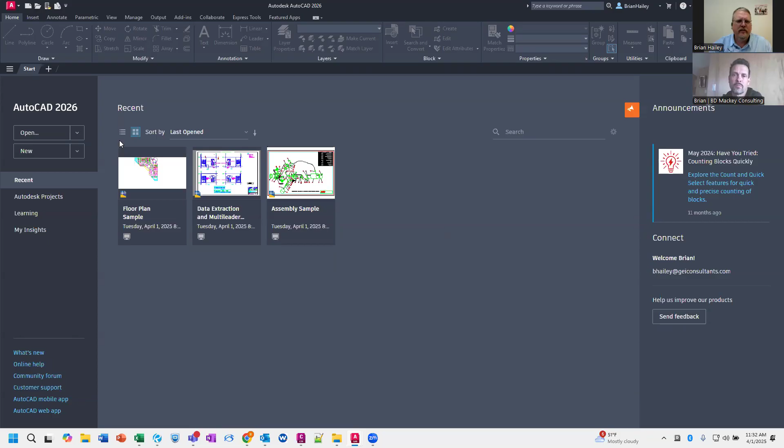Excellent, okay, so the first thing I'd like to show off with 2026 is the new block identifying thing. So let me go ahead and open up a drawing here, and I think this is pretty cool. Where did I put that? I put that here.

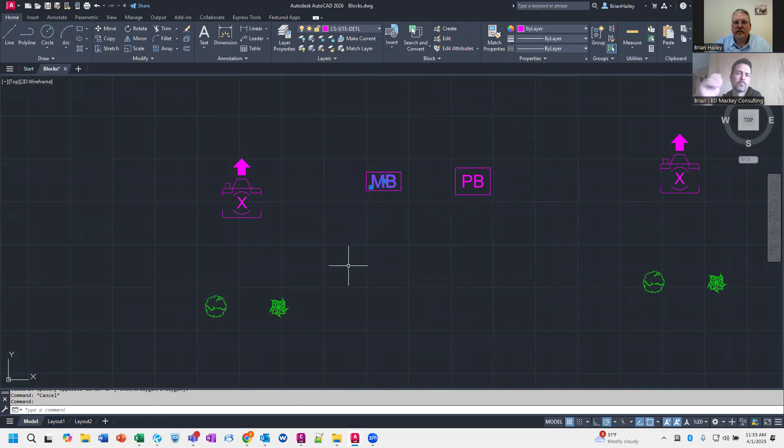There we go. So in this drawing, I have a bunch of blocks that I brought in and exploded. As you can see, it's just a piece of text with a rectangle around it — this is just line work. Here we've got this little planter, and again they're just lines, but I've got lots and lots of copies of them.

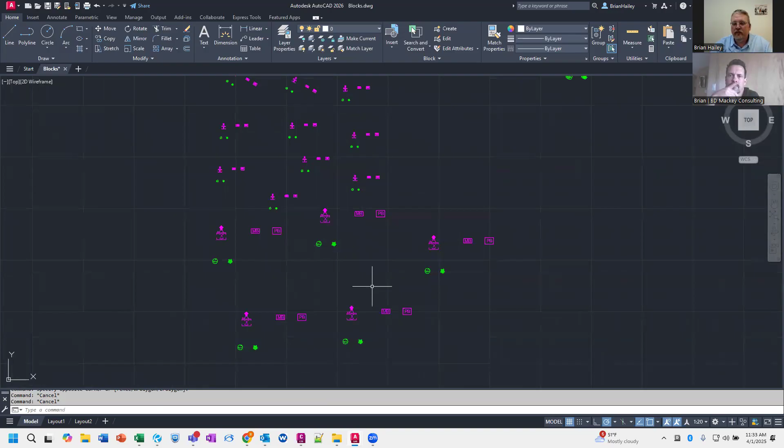And what I would like to do is take this copied line work and replace it with blocks. So if I come in here, what I've done is created some that are at different scales and at different rotations. You can see I rotated some of these groups of blocks up here; these ones I've scaled up a little bit; and these ones over here, I just kind of overlapped each other to see if that would cause any issues with other line work being in there.

So what I'm going to do is start off with, let's go with this camera. All right, I'm going to select this — actually, let me start off with this tree here. So I'm going to grab all the line work from this tree, and then on the Home tab, up on the ribbon, under Blocks, we have this option to search and convert. So I'm going to run search and convert.

And what it's going to do is go find all of the symbols that look like what I have selected, basically copies of the line work, and identify them. As you can see, it found all of these symbols here, but it did not find the ones that were at a different scale — so it doesn't detect different scales. Let me go ahead and cancel this here real quick.

But what I will do is try this with one of those smaller ones. So I'll grab a block, search and convert, and what you'll notice is it does find them at different rotations. So it doesn't identify things that are different scales, but it does identify things at different rotations. And then I can simply click on convert.

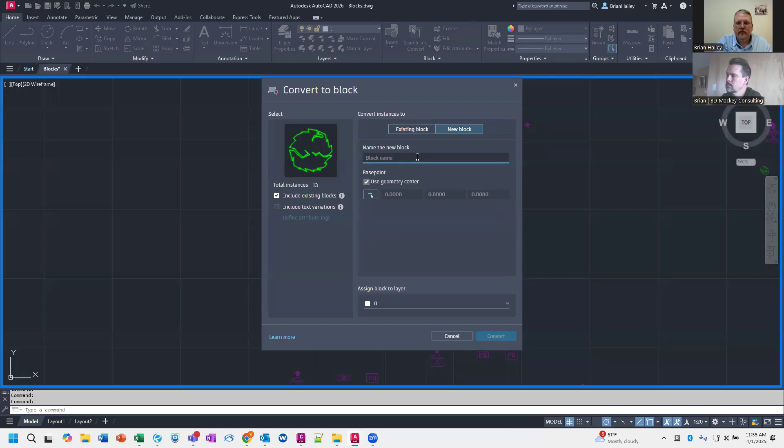I'm going to create a new block from this, and I'll call this tree one. I'll select convert, and now those are all blocks.

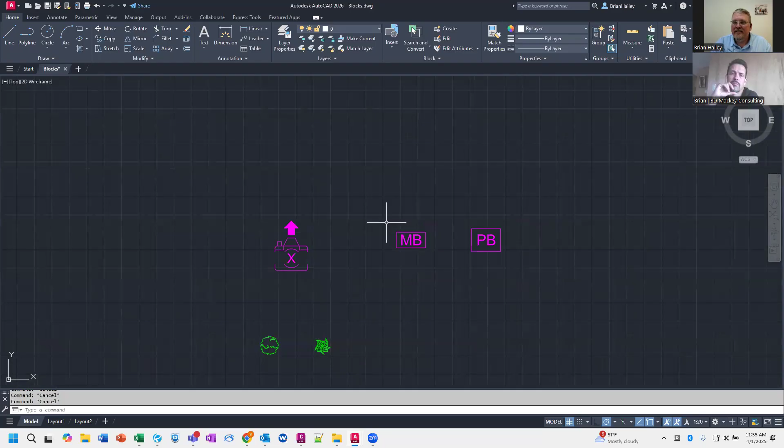I think that's pretty cool. Now, if it has text in it - this particular one is a mailbox, a symbol we use for a mailbox. This is not intended to be an attribute. The X in the camera is intended to be an attribute.

So I'm going to do the same thing. I'm going to select my mailbox here, do search and convert. Again, it finds all the different versions of it. I'll go ahead and click on convert. Then on the left-hand side, I can choose what I want done with the text. Right now, include text variations is unchecked, so it's just going to be text in the block.

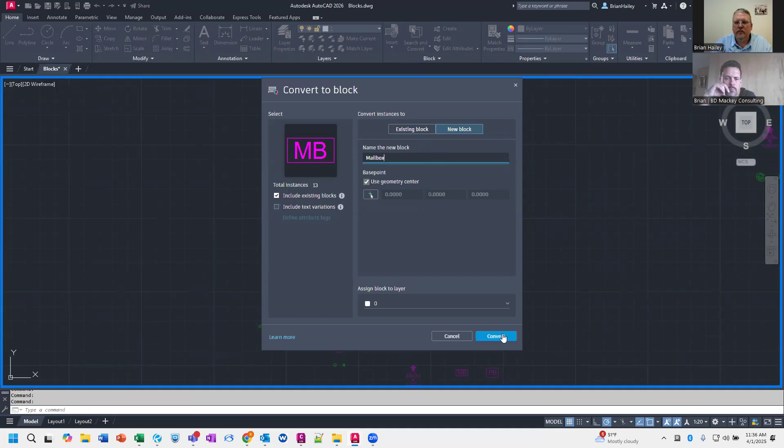Again, I will create a new block. We'll call this one mailbox, and I'll convert it. And now it's a mailbox. Now for the camera, I'm going to do the same thing.

Search and convert. But this time it is intended to be an attribute. So when I convert it, over on the left-hand side I'm going to choose include text variations. Now what it's going to do is take those text pieces that are part of the line work I selected and make them into attributes. Then if I want to, I can define the attribute tags - so I can say, hey, this is going to be the ID number.

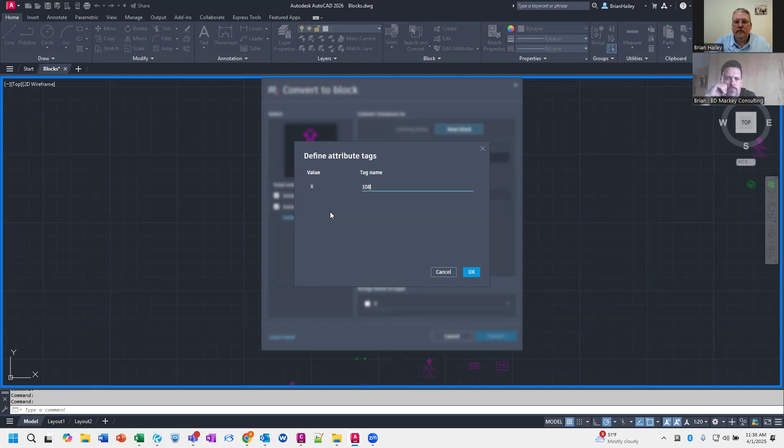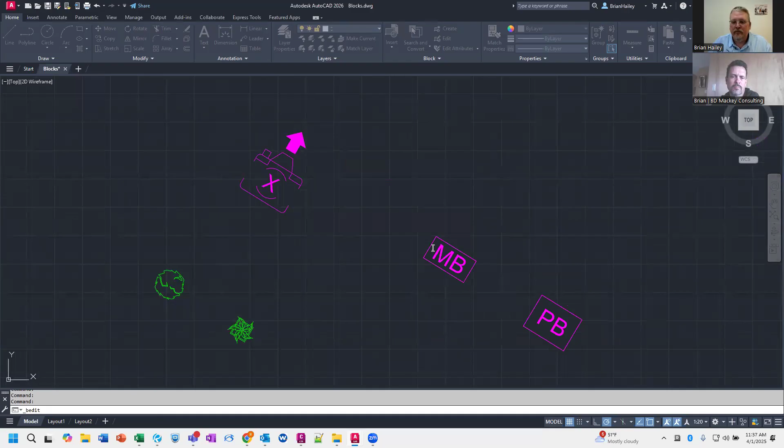Again, I'm going to make this new one, so this will be camera. Convert that. And now you can see when I double click on that piece of text, it brings up the enhanced attribute editor. If I do the same thing for the mailbox, it just brings up the block editor because it is not an attribute.

All right, so I think that's pretty cool. Now, another thing we can do here - I'm just going to undo everything I've done. In addition to search and convert, we have detect and convert, and I guess this might be AI - I don't know if this is considered AI or not. But what this is doing is searching the drawing for things it thinks might be blocks.

For marketing purposes, it's 100% AI.

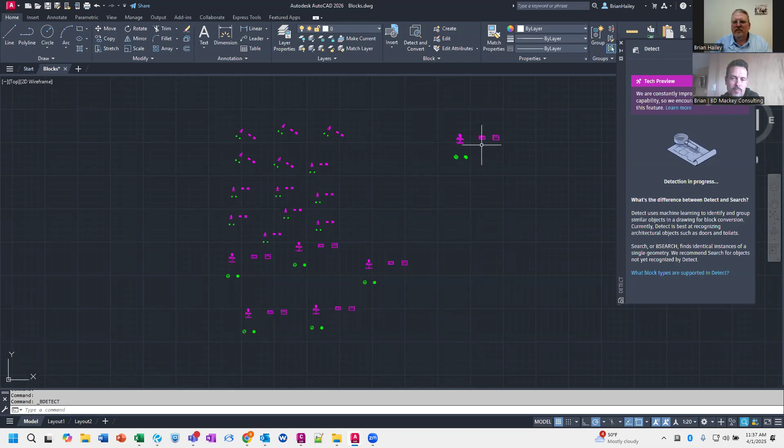Now this isn't going to find everything. I think there are certain types of things it's going to try to find as blocks. For example, it did not find my mailbox - I don't remember what that other one is, maybe not. Anyway, it didn't find these two, but it did find the trees. If I click on my little trees there, it found those, and those. It didn't find the larger tree, interestingly enough. And it found half of the cameras. So it's not perfect, but it's there as an option.

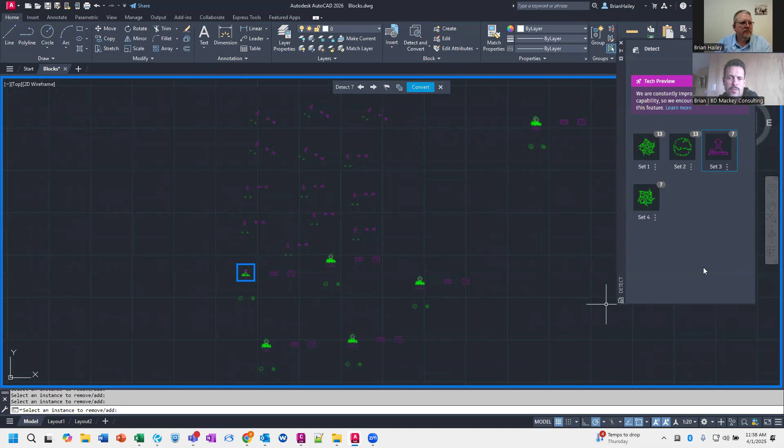And from what I've read, this is geared more towards architectural type blocks. So we now have no reason not to explode everything, so the AI can find it and convert it back to a block. Oh.

You're killing me, Smalls. Hey, it's April Fool's Day. You know, that's something we can say.

All right, so that's pretty cool. And as Robert put into the chat, sure, it's vested in architecture - ignore the civil world as always. Yeah, but we're used to that.

Which is hilarious because so few architects are using AutoCAD anymore, but they still design features like that towards architectural stuff.

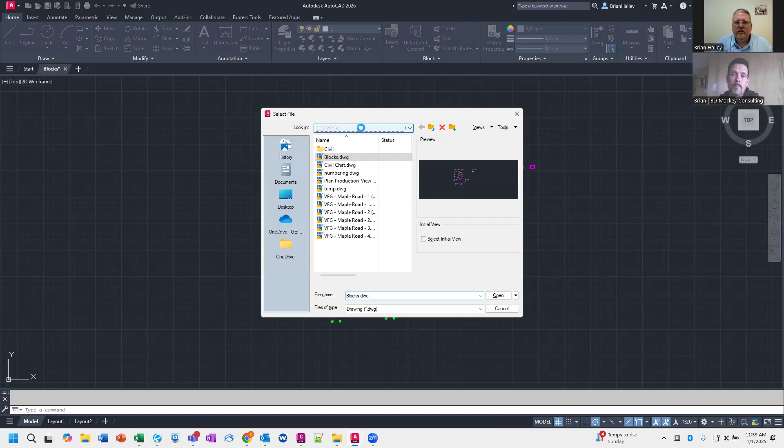Okay, the other thing I wanted to show, I'm going to open up a drawing. This is an Autodesk Docs drawing, just a drawing I made and uploaded to one of my projects.

Here's something new, and I'm not sure if I'll use this or not. Because this drawing is part of an Autodesk Docs project, if you go into your options on the Files tab, you'll notice at the very top we have Project Aware Settings. Basically, this takes some of your support files and makes them project specific, so when you open a drawing associated with this project, you get those specific support paths.

This particular project hasn't been set up for this yet. If I come over to this blocks drawing and go into options, I don't get that option at the top of my files. But if I go into the circle drawing and go back into options, the project aware settings are available, because this drawing is saved in an Autodesk Docs project, on ACC in this case.

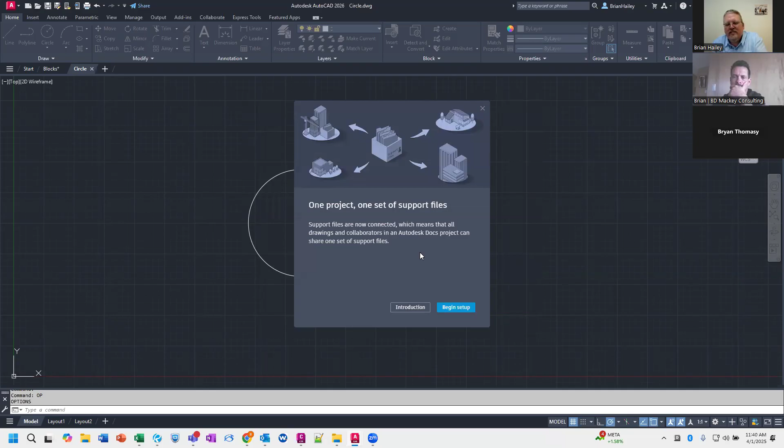So I'll click on setup, and it walks you through the process. It creates another folder in your project for storing the support files for this project. I'll begin the project setup by clicking setup project.

It says set up your project with one click. That's the third click it's taken me to do this. And now here's the fourth click.

Now you can see we have Project Settings and My Settings. I don't know if we'll be able to use this, because one of the things included is tool palette file locations, and under the classic AutoCAD settings there's no tool palette file locations. The way we have our tool palette set up, clicking on one of the buttons changes your support file search path to look for the new location for the tool palettes you're interested in. So I'm not sure how this will work with our system, but it's here if you want it.

If I mouse over this, you can see project settings are stored in the Autodesk project and take precedence over my settings and classic AutoCAD settings. To set this up, you have to have project administration access to modify it—you don't have to be an ACC admin, just an admin on this specific project to change these.

Then you have My Settings, which are the ones I like to use, and then the classic AutoCAD settings. If I come over here to my tool palette, you can see the tool palette path.

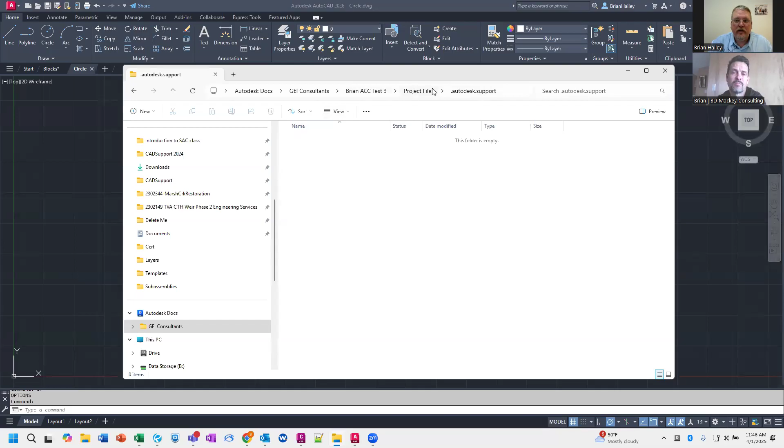Adam just brought up a great point. You could create your own standard and bridge it across to the projects. So when you create a project, create that bridge link, and your office standards could potentially be there. They created this special Autodesk support folder, and I imagine it's just a folder you could do anything else with, so if you wanted to bridge this folder, you probably could.

Yeah, that's interesting. Good thought, Adam. I like it.

So yeah, I'd love to hear other folks' thoughts on what's new in AutoCAD. I also wanted to show off some fun things you can do.

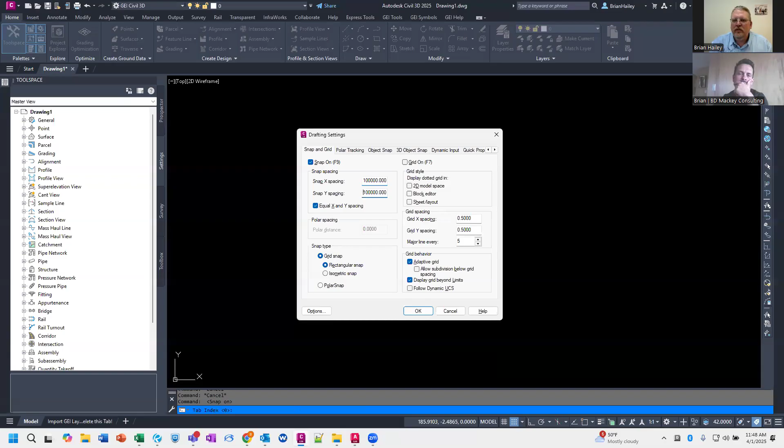Now, when you're mousing around, not a big deal. If you notice, my snap is turned on, but as long as I'm not in a command that's asking me to select a point, my crosshairs just do whatever. But as soon as I start a command, I start the line command, my crosshairs disappear. If you notice, my mouse is up here, now it's over here, now it's down over here, but I have no crosshairs.

Why? Well, let me zoom out. I probably can't zoom out that far, right? Let me zoom out a lot. If I draw a line again, I've got a grid, a 100 million grid. But if I'm zoomed in really tight, then I'm inside of the grid and I don't see my crosshairs.

So this is a kind of a fun one. It's simple to turn off. You can just uncheck snap to grid, but then as soon as you turn it back on, it goes away.

So that's a fun little practical joke that you can do on a coworker, perhaps. Again, it's harmless. It's not going to hurt anybody. They'll be like, 'What the hell?' And then you come over and fix it for them.

I still think the best one for me is changing the command line text to be the same color as the command line background. That is still my most fun one. So if you go into your options on the display tab and then colors, you can change the colors of things. So right now you can see my command line background is this blue.

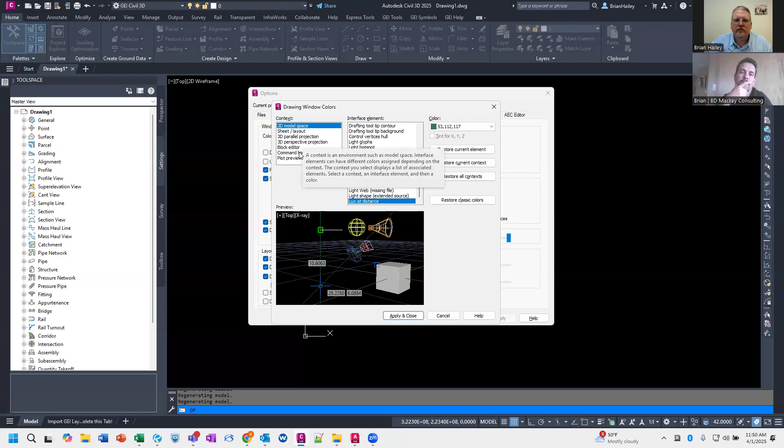So if I come down here to, where is it? It's one of these. I can't remember which one it is. Not crosshairs. Oh, it's over here, I have to change context to the command line. There it is. So you have command line history background and then command line history text.

Active prompt background, you can see is 150. Active prompt text, I can change that to also be color 150. And now when I'm typing, I don't see anything down the command line because the text is the same color as the command line.

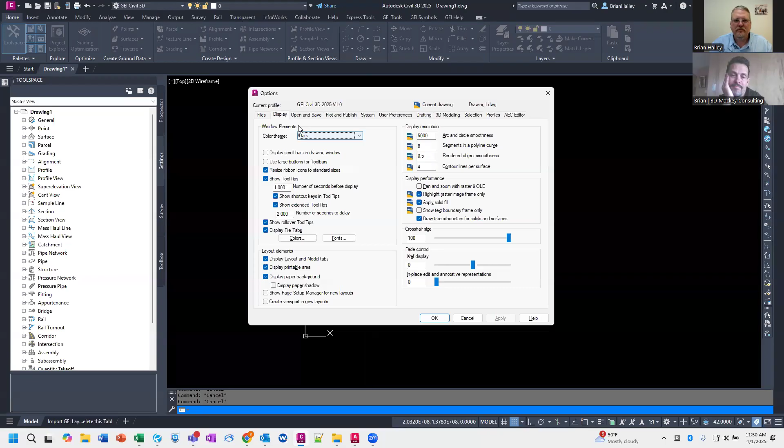All right, so we do have 4 questions now. Did you want to jump into some of those questions? Let's do a question. All right, so the first question is, I'd like to take jobs on Upwork. What do you recommend as starting point for grading, drainage, and erosion protection design?

Is Upwork like a job board type of a thing? I'm not sure what Upwork is. So if you could put that in the chat or the quick Q&A.

But anyways, if you want to get started doing grading, drainage, and erosion design, are you talking about just learning what it is, how to do it in Civil 3D? It's a freelance website, I think. Gotcha. So I guess it depends. Are you looking to do it as an engineer or as a civil designer?

If you're trying to figure out how to do it in Civil 3D, I think the best thing to do is just experience. Go find a set of plans that has some drainage or some grading on it, and then try to model it using the surface tools in Civil 3D. That's what I did to learn Civil 3D. I took an old project that I did in Land Desktop and I remodeled it in Civil 3D so I could learn how the tools work.

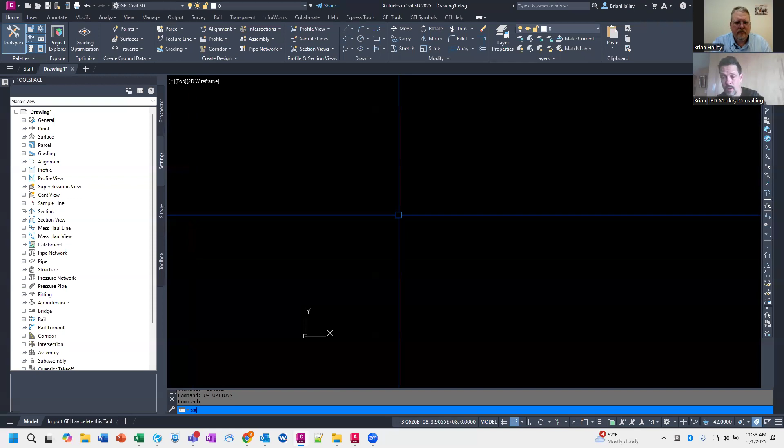Not that I know of. So if you go extract a PDF... where would I have a PDF? Probably here somewhere. Not to mention just a PDF, a multi-page PDF.

Let's try this one. No, that's a single page. Exactly.

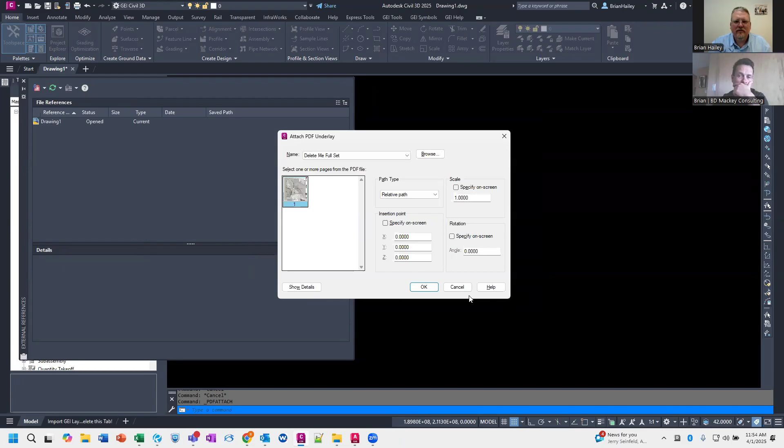Let's try this one. Full set. Again, one page. Um, that's an invoice. You shouldn't be seeing that.

Let me just go make one here real quick. Let me do it this way.

Sample sheet sets, civil sample sheet set. And we'll just do some existing conditions here, published PDF. It popped up on my other screen behind the Zoom stuff.

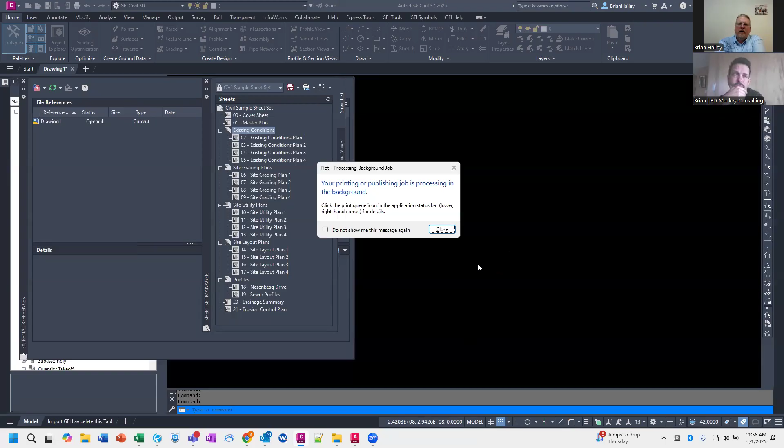And then we will let that plot. Like I said, I don't think there's a way to change which sheet it's using after the fact, but we can definitely take a look. If we can, I imagine it would either be through the properties panel or through the XREF palette.

Oh, that's a good idea. We should check in 26. Now you just need a multi-sheet PDF. That's still the same problem. Right.

Isn't done yet, published job in progress. Yeah, I don't think there's a way to do that. Once this PDF's done plotting, we'll circle back on this question, see if we can figure something out.

Cool, so then we have a question from Greg. We are struggling with connecting Civil 3D tables to Excel without using a third-party product. How do you suggest we go about this?

Use a third-party product. Yeah, there's no way that I'm aware of to export a Civil 3D table out to an Excel table.

So Ian put in Civil 3D to Excel, Project Explorer. Project Explorer might, but it doesn't take a table. It'll take the data, but it doesn't take the table.

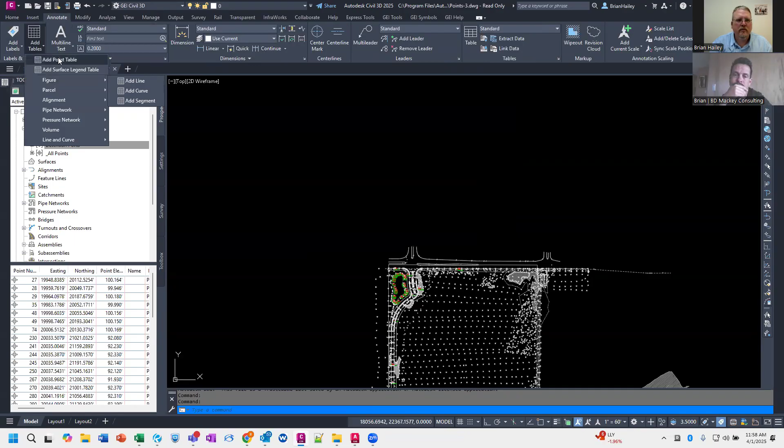All right, so I got a drawing here that has points in it. And we'll use this detention pond point group here. So I can go create a point table for the detention pond points.

Right, and so I set this table up to display the way I want, and then how do I take this table out to Excel? And again, as far as I know, there's no way to take the table.

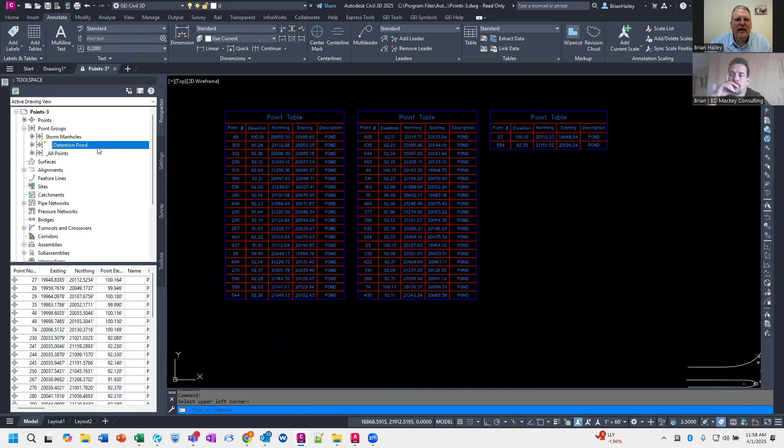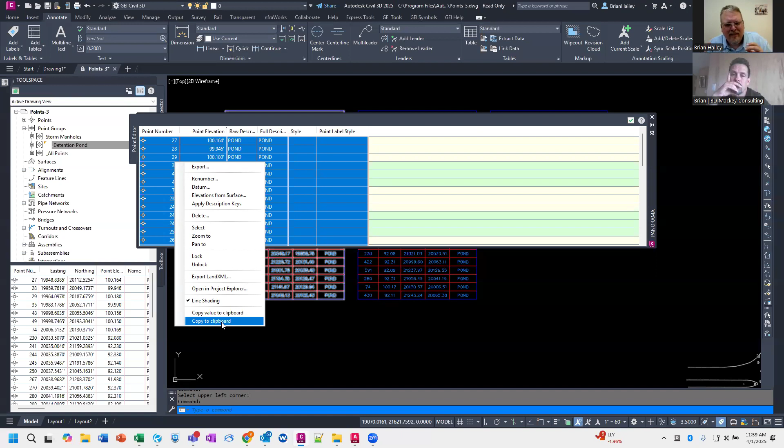A couple of things I can do. So if I go edit the points for this group, I can take all this data, select it all, right click, copy value to clipboard or copy to clipboard - I can't remember which one - and then paste that into Excel. So that'll get the data over there, but it won't necessarily take the table, the way the table is formatted, the information in the table, the order that it's in.

Somebody mentioned Project Explorer. Yeah, and Ian said he uses Project Explorer to create the table and then export that to Excel. Okay, so if we come over here to points, there's the detention ponds, create a table. So you can do quick report to file, or quick report to AutoCAD table.

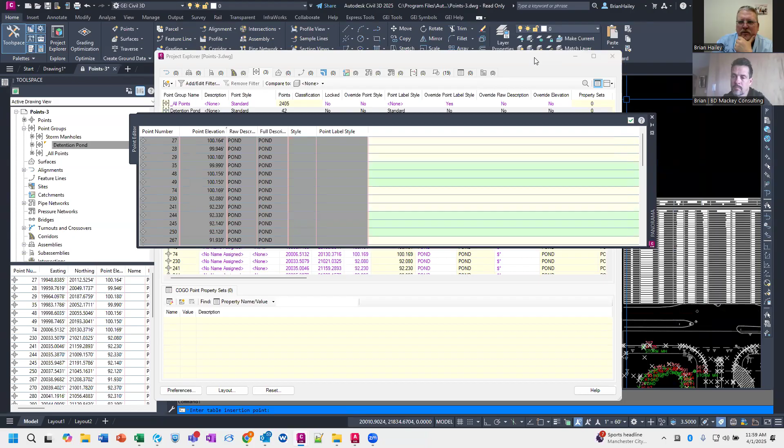So that creates an AutoCAD table. Right, and then you could take the AutoCAD table. Ooh, that's a lot of information in there. I wonder if this would update if we change something.

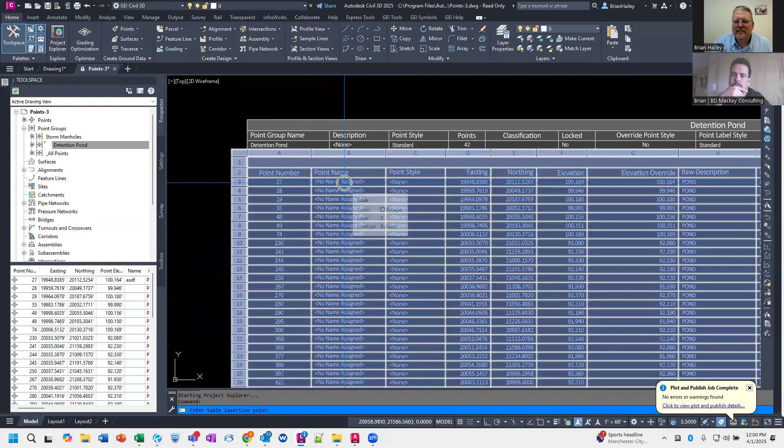If we go to point number 27, we give it a name. All right, so point 27 does not have a name here. Is it like a link table where you can update it? Update it? No, it's just a static table, so it is not dynamic to the data.

He says it can be done in one action via object sets. Okay, but yeah, again, it's not a Civil 3D table. This would be another way of getting the data out.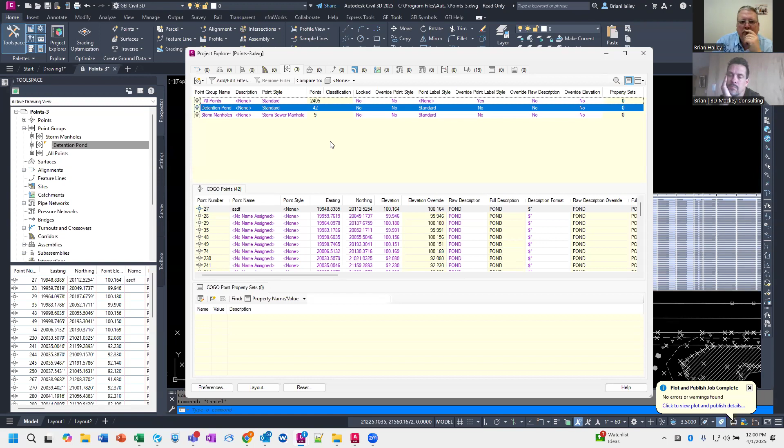So, there's no way that I'm aware of without using a third party to do that. Ian said there's an AutoCAD table that might be sufficient, and Ian mentioned Civil 3D to Excel, using Project Explorer.

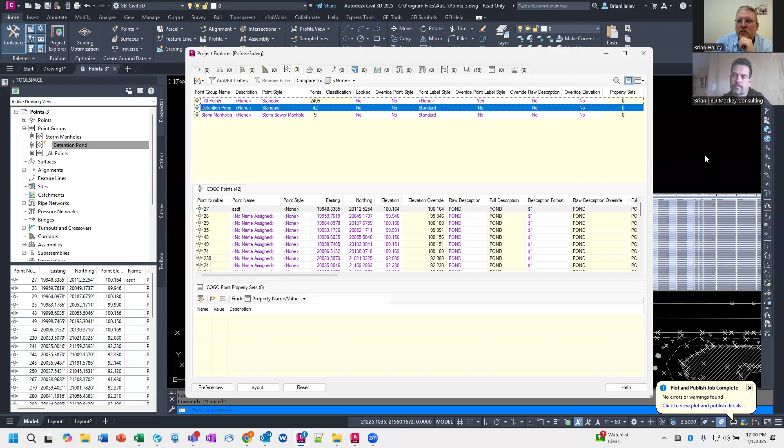I thought maybe that was the name of the third party app. If you guys aren't using Project Explorer, there's a lot of cool stuff you can do in it. It's modeless, so you can throw it on your second monitor and continue working in CAD while it's running. I highly recommend Project Explorer. I like it.

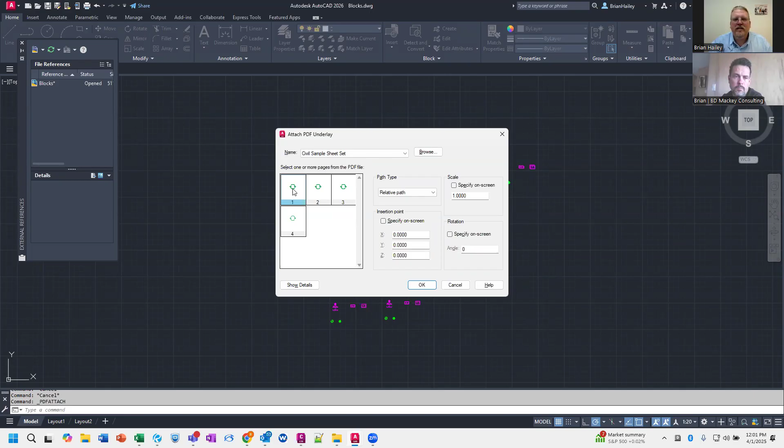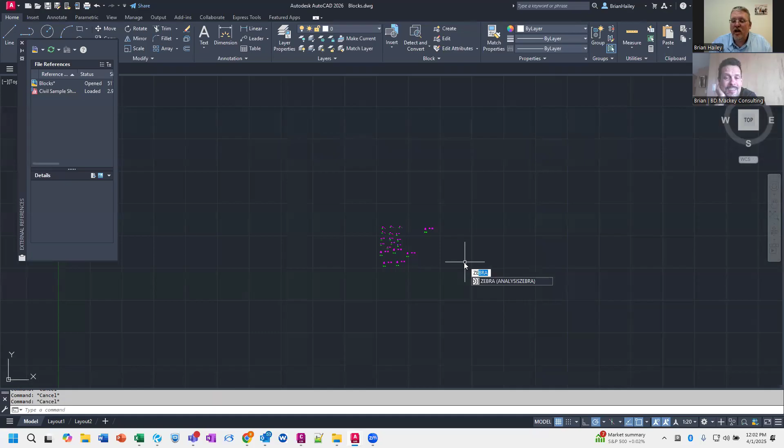All right, so here's the PDF. If I select the PDF, I would expect it to be visible down here somewhere. So that's the name of the reference, I think. And the reference name does not give us an option for the actual sheet itself. If I go into my properties, miscellaneous page number 1 is grayed out.

So it does not look like that's an option to change either. So I guess you could go into the PDF and reorder the pages. Would that work? I don't know, so yeah, it doesn't look like there's a way to change which sheet it references, unfortunately. Sorry about that, Robert.

Adam says in the VBA properties, it's technically in there—in the comments, if you go to PDF underlay dot item name, which should reference the PDF, you might be able to use a Lisp or VBA to change it. Yeah, that would not surprise me at all if you can do it using some sort of extra code. I would expect you could do it here since it does show us what page it is.

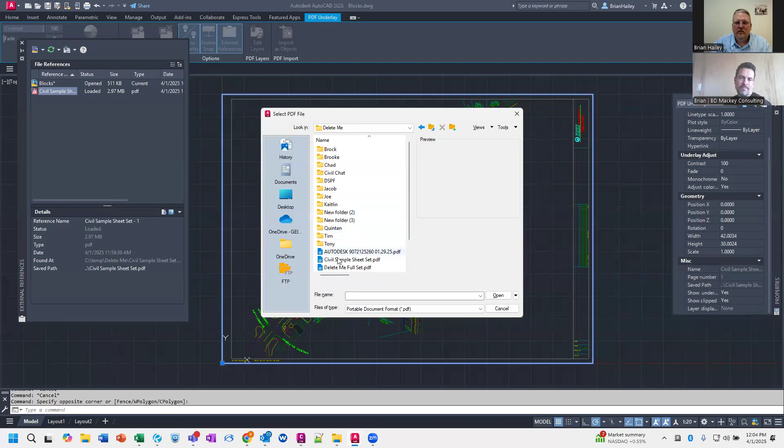Why not let us change which page it is? Yeah, you know, things like that, you're always like, okay, why was that so hard programmatically to do? Because the value is literally right there. I want to know. Select new path, maybe? And then can you find that same thing, then choose a different page? No, it just does not work like that. It changes the path, but you can't change which sheet it's referencing. Fascinating.

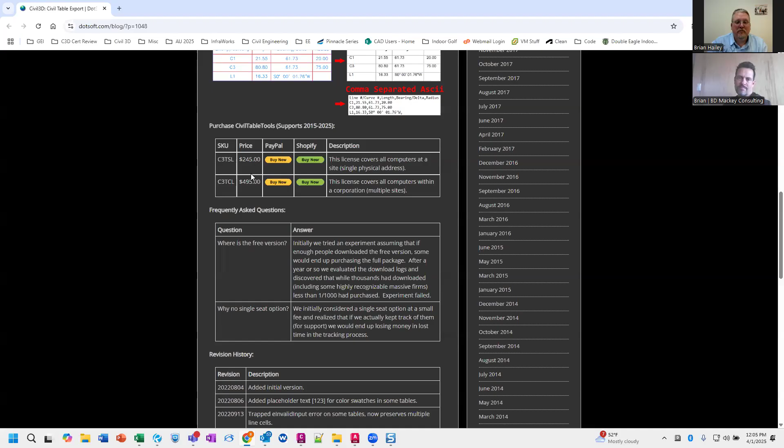Yeah, looks like it's $245 or $495, depends. But if you do it a lot, it might be worth it. Yeah, there are times when I look at add-ons like that and think, oh no, I just don't want to do that. Then I think, if I use that four times a year, it's gonna save me time—I'm just buying the damn thing.

Danny said there are some other free ones in the App Store, so go into the App Store and search for a convert Civil 3D table to Excel table type of thing.

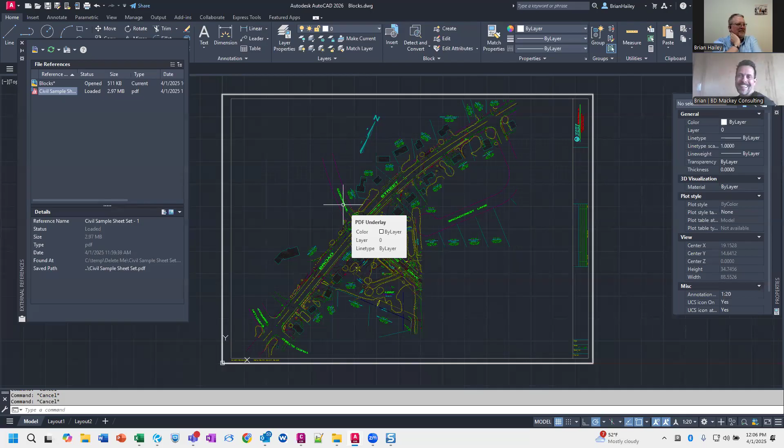All right, so Sean has the question: do you ever use the roadway intersection grading tool palette for grading an intersection, or do you find it easier to create individual feature lines for each curb return, create your own surface at the intersection, and add it to your corridor? Roadway intersection grading tool palette—I'm not familiar with that, so I guess the first answer is no, he doesn't use it. All right, let's switch back over to Civil 3D here.

Would that be under the standard? Well, I have the corridor. I got the miscellaneous ones here. Would it be somewhere here under highways, maybe? No.

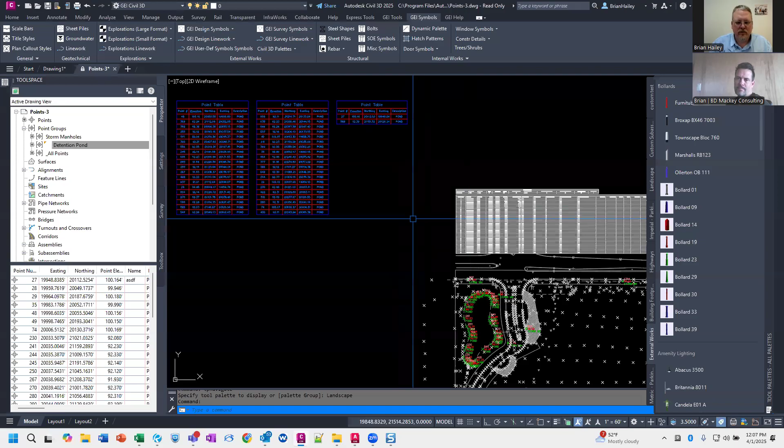So help me out here, Sean. Where do I find this amazing tool palette? Maybe I should switch to an out-of-the-box profile. Maybe it'll show up here. Oh, that's horrible. Apparently I was doing some screen capturing with this one last time.

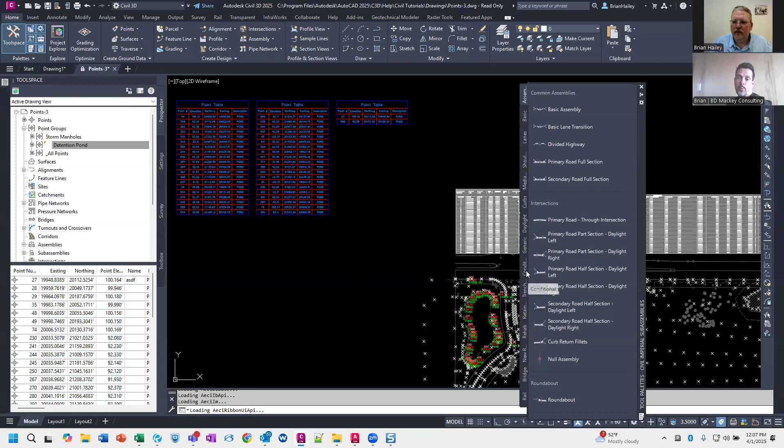Then the tool palette. So I got basic lanes, shoulders, rail. Not seeing it. His answer was it's in the tool palette. Right, I'm looking at the tool palette. Median, shoulders, but these are the... maybe it's in a different group. Mike says it's within the intersection wizard, question mark.

We go to all palettes here. If you go parking tools, I'm not seeing anything with intersection yet. High intensity discharge. Yeah, I'm not seeing any intersection grading tool palette.

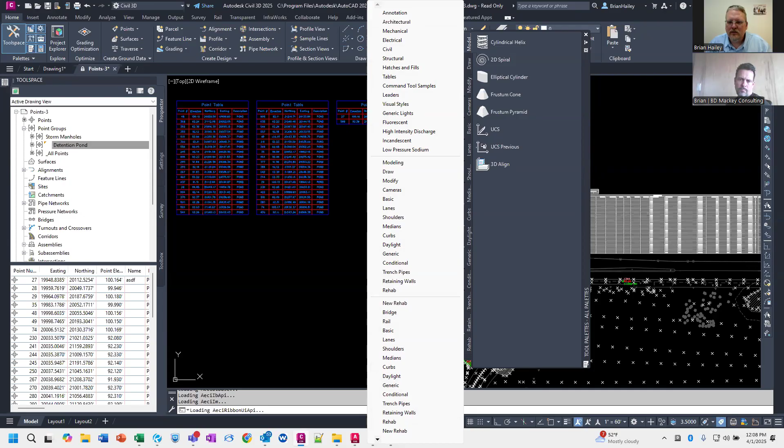There's parking tools. I don't think that's what you're referring to. Yeah. So I'm not sure what you're referring to, Sean. Oh. Could this be a custom tool palette that was created for your organization, perhaps? No, he says no.

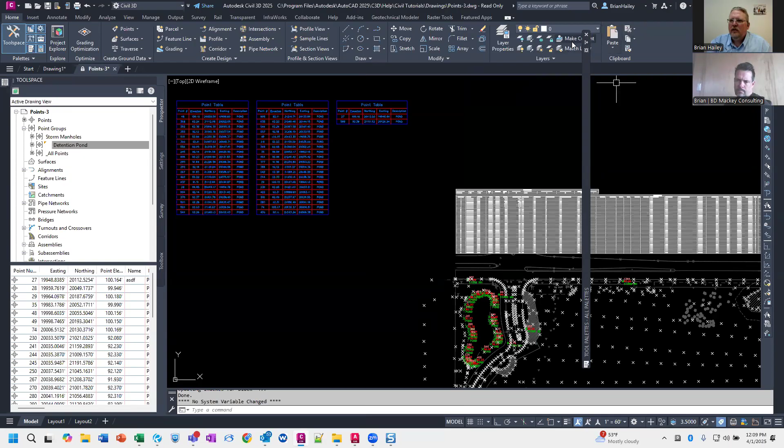Yeah, but it might be part of the intersection wizard. So let me go take a look at that. All right, he said he will find it. Program files. I mean, yeah, let me switch back to my main profile here. No, I'm going to stay here.

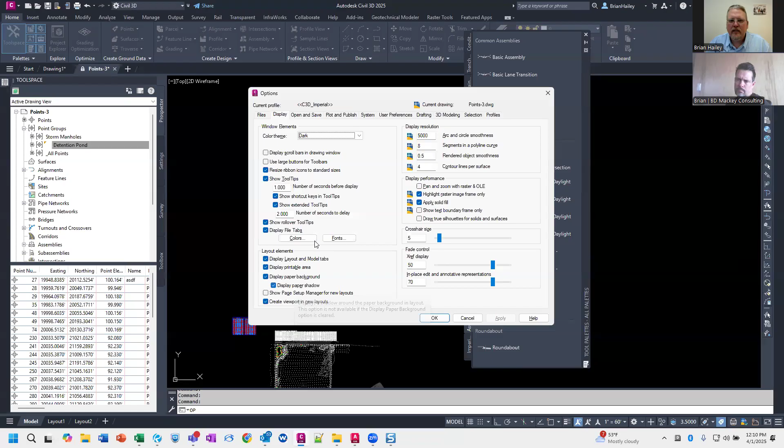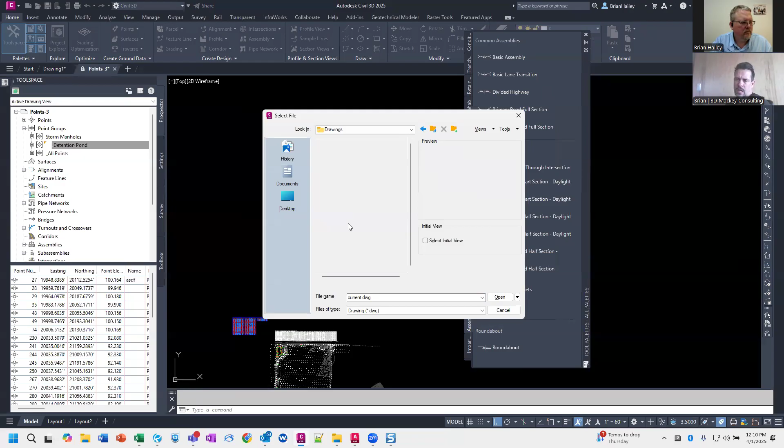While you're opening up the file, Mike had come out and said he does classic intersection workflows with vanilla corridors and assembly. Takes a bit of time, works well enough, but he does not use feature lines. And Corey said, yeah, he does the same. Intersection, yeah, let's do this one here.

So as far as using the intersection tool, right? On the ribbon, the home tab on the ribbon, we have intersections, create intersection. This works really, really good for simple intersections. If your intersection is complex in any way, shape, or form, it's not going to work well for that.

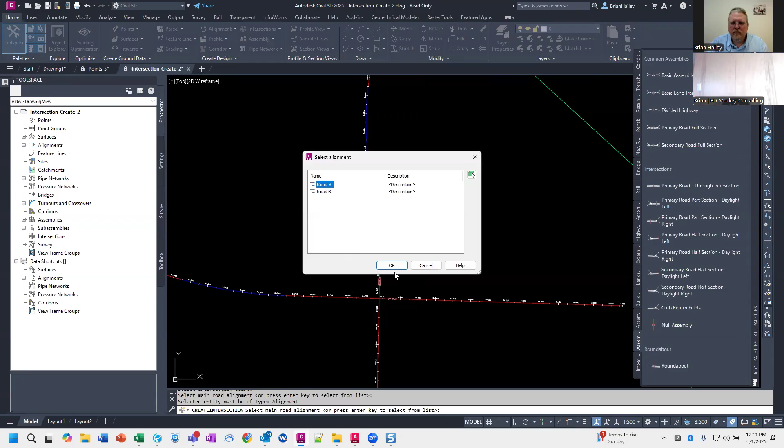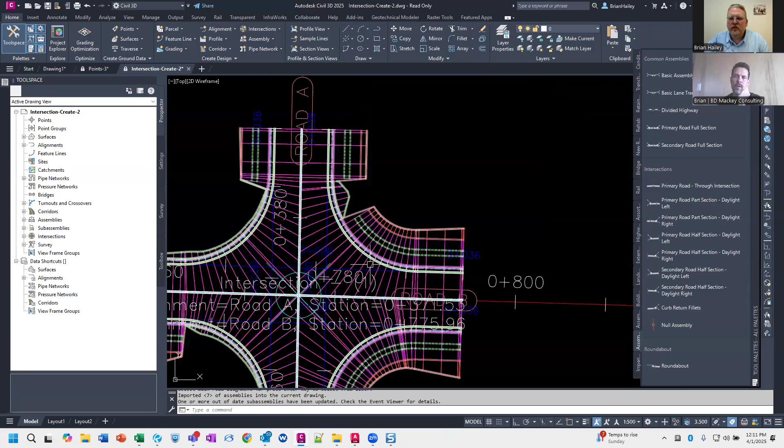So if I snap to this intersection point, I can choose which one I want to be the primary road. Like that one. And you can walk through this. You have different options, so the primary road is a crown, or they're all crowned. So I'll just create one here real quick, real simple. And what it does is it creates your offset alignments with profiles automatically for you. It imports your sub-assemblies for you.

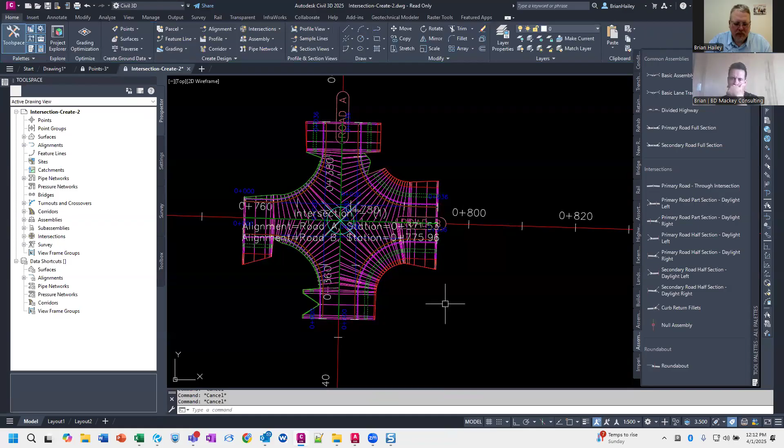And it helps automate this whole process. It did create a corridor. If you had an existing corridor, you could have it incorporated into that existing corridor if you wanted to. Let me open up a drawing where I've done some intersection design, and I'll show you the approach that I took. Let's see if I remember where I put this. It was under documents.

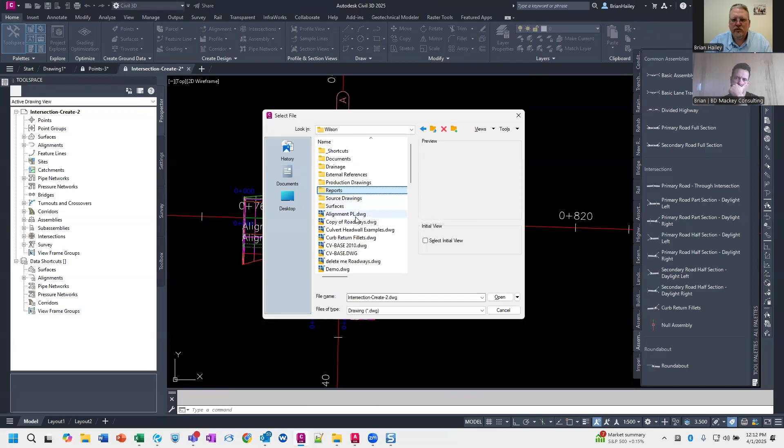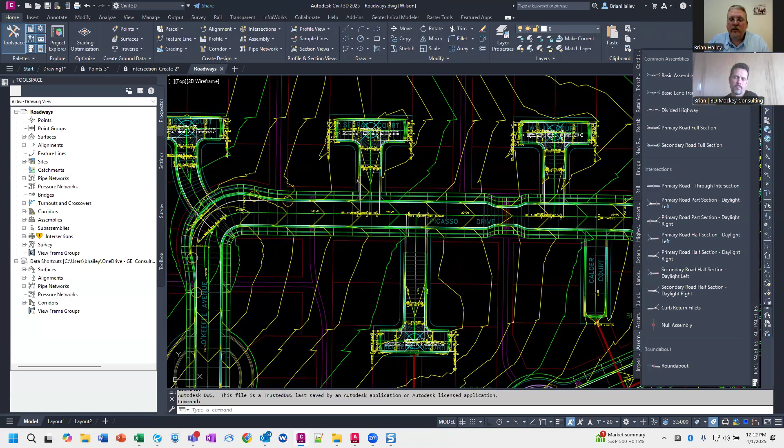Interesting. Okay, whatever. Apparently I'm missing something. So I just installed AutoCAD 2026 this morning. I wonder if that had anything to do with it.

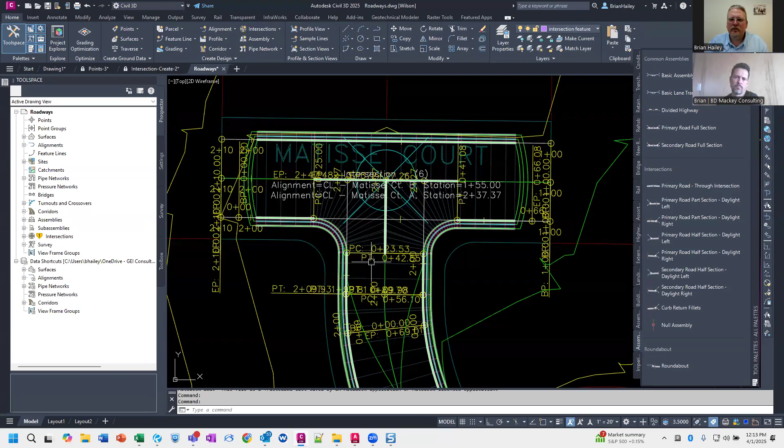Okay, but so you can see I've got a bunch of roads in here with a bunch of intersections. I did use that intersection tool for some of these simpler intersections. For example, up here in these little courts, right? We had the primary road running through here, the secondary road, super simple intersection. Just had curb returns for the curb and gutter. Nothing special, nothing unique about these. And so I was able to use the intersection tool for these.

When it came to, let's see, let's take a look at this one here, something like this, where we had a cross pan going across the intersection. So this is just a concrete pan for the water to flow down on both sides. There's a neck-down for traffic calming. Yeah, there's no way I would try to use the intersection tools for something like this. This is just too complex.

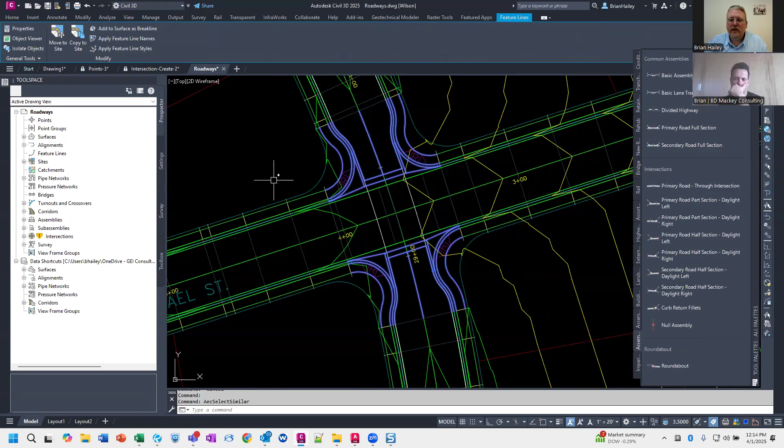And so what I did is I simply used feature lines. I did my corridor up to wherever I thought would be a standard section, including right through the middle of the road here, because that's just your standard 2% cross slope through here. And then everything else I did with my feature lines. And then I just pasted those into the corridor surface directly. I don't know if I would do that. Again, I might create individual surfaces and then paste surfaces together. But that's kind of the approach I took for this.

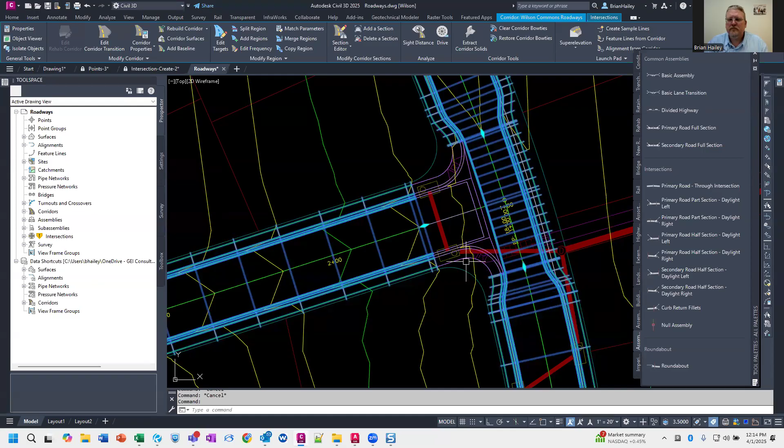You can see I did the same thing here. I was able to do more of the intersection with a corridor here, and then this area just didn't lend itself to a corridor, so I did it with feature lines. So hopefully that helps.

Well, that was fun. I just had Zoom crash on me. I can still hear you. It restarted, it shut off and reopened.

Well, that sucks. So I assume you got that question done because I have no idea. I think so. Okay, I just still don't know where the intersection tool palette is.

I've never heard of it before, so unless he's referring to these intersection assemblies over here, maybe that's what he was referring to. These intersection assemblies, and if that's the case, these are just examples, in my opinion. They're not intended to be used for a real roadway design, they're just here as examples.

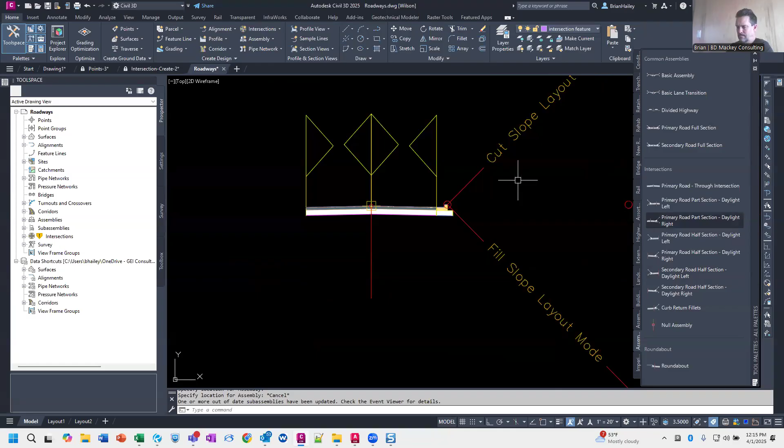So if I insert one of these into this drawing, it's just a simple road with basic curb and gutter, basic lanes, daylight. It'll probably won't match your project, so you'll need to adjust it to match your project. So maybe that's what Sean was referring to.

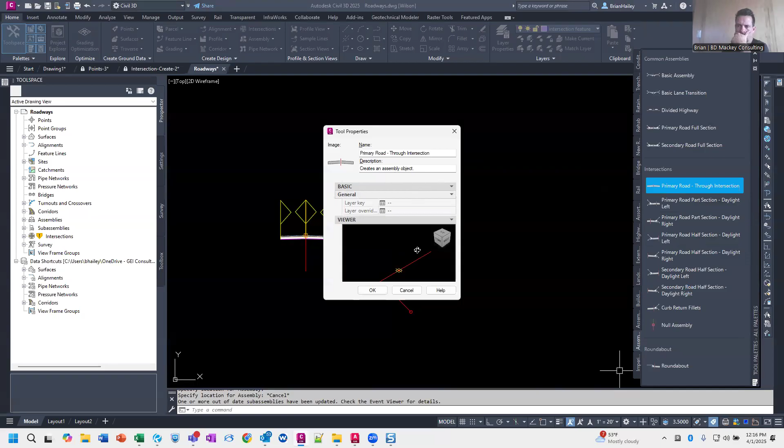Okay, so yeah, these are just, I like to think of these as just the samples. There's not much you can do with them. So if I right click on one of them and go to its properties, it's just an assembly with everything already set up on it.

What you can do is create your own assembly, maybe for a municipality where the cross sections follow certain criteria, and then take that assembly and add it to your own tool palette so it matches the design criteria in your area.

So that's my thoughts on this here. These are the sub-assemblies, or the assemblies, that that intersection tool uses by default.

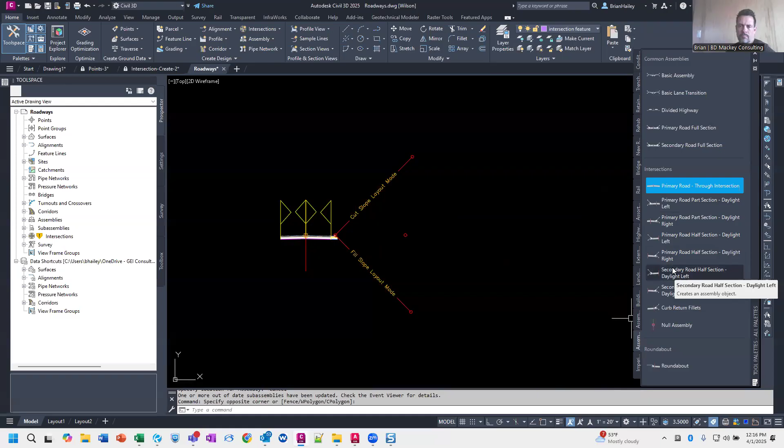But when you do an intersection, you can choose the assemblies you want to use. So you can pre-create your assemblies for your intersections, and then when you create your intersection, you say, hey, I want this part of the intersection to use this assembly and this part to use this assembly.

So, all right, are you still with us, Brian? I jumped in and out two more times, so I'm completely lost in where you are. So I think we're ready to move on.

You answered Mike's question. No, I haven't gotten to Mike's question yet. Okay, I'm still doing intersections. Yeah, I jumped in to say Mike's question and lost again. So cool, we'll do Mike's question.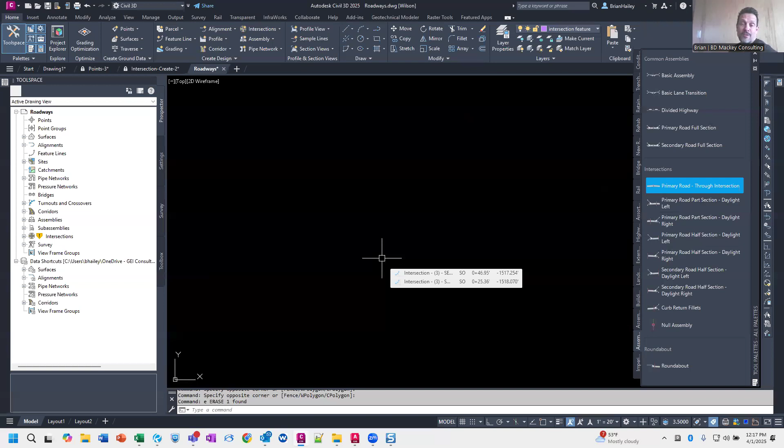Does anyone use the extract feature lines from the corridor command? I stopped using this workflow because I keep having problems with the dynamic feature lines not updating with the corridor.

I don't use it very often. I think one area that I could see it being useful for would be like the gore area of an interchange. If you've got the ramp and the main road and the bridge going over, and that area between them, it might work well to do grading off of the feature lines rather than a corridor, since it doesn't lend itself to a corridor. But I haven't used it much.

I'm going to reach out to the thousands and thousands of people watching this to see if anybody else has run into those issues, but I haven't run into any issues with it not updating either.

So Mike, you're saying that you extract the feature line, you update the corridor, and the feature line does not update with the corridor. Is that right, Mike? Just want to make sure I understand correctly.

Correct. Okay, perfect, yeah, I haven't encountered that issue myself. But unfortunately, if that seems to be an issue, if it's something you can replicate, definitely send that on up to Autodesk Tech Support so they can get it fixed. But yeah, it's not something I'm aware of.

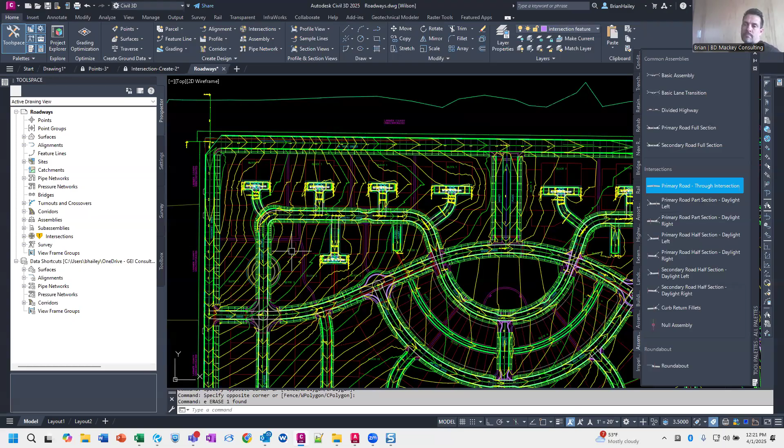And Beverly did have a thought on that last one for the corridor line. She said, in the dialog where you extract the feature lines from the corridor, check the settings to make sure the link dynamically to corridor is checked. Right, yeah, that makes it a dynamically linked corridor or feature line.

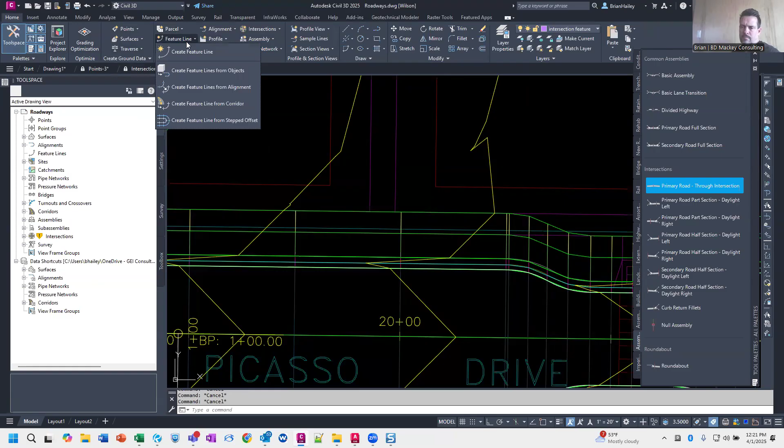So what she's referring to, it's been a while since I've done this. See if I can grab the corridor and then not extract solids, the feature line from corridors. Right, feature line from corridor, that's where it is. And we'll do the edge of travel way on the left.

So now I have a linked feature line. But in that dialog box, there is... where's that option? Have they changed it? Under settings, maybe? Yeah, there is. Under the settings, there's the dynamic link to corridor. Make sure that that's applied. I'm assuming it is.

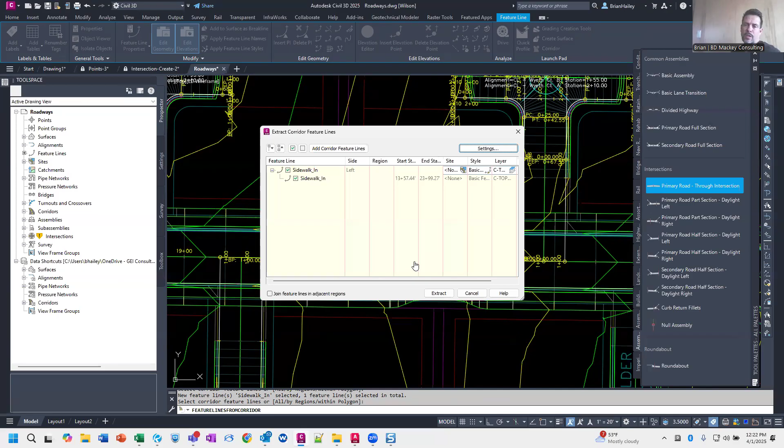Mike said, yes, he's had it checked. He's even tried doing it with it checked, unchecking it, rechecking it. Yeah, I figured you probably had, Mike. I was more pointing that out for people that might not have known where that setting was. Always nice to know, because I didn't know about that setting.

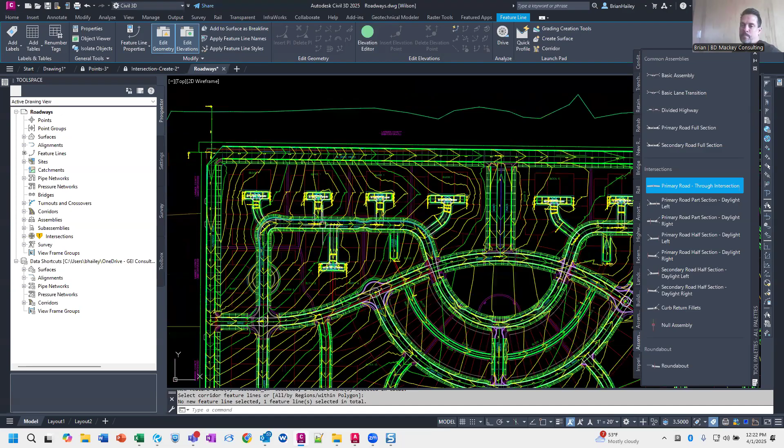All right, do we have anything else? That was all of the questions.

So you have 5 minutes to show your best April Fool's joke for people to play in the last hour of the day on their coworkers.

So it's been a long time since I've done this one, and I think it's still the same. I was actually shown this. I had a group of people from the same office come in for some training, and I showed them how to do this. And the guy in the back corner, who's like the manager of this entire CAD team, crosses his arms, sits back and says, 'And that's why I always lock my computer when I leave my office.'

Well, I happened to be over at their area, and I walked by this guy's office, and he wasn't in the office, and his computer was not locked. So what you can do is go up to somebody's computer, you can even do this when they turn their back. You just go up to the computer and do a Control-0, Control-9, Enter. And that does a clean screen and turns off the command line.

So Control-0 does a clean screen, Control-9 turns off the command line. And the best part about this is he comes back into the office, sits down, and is working in CAD for probably 5 minutes before he realizes what I'd done. It was awesome.

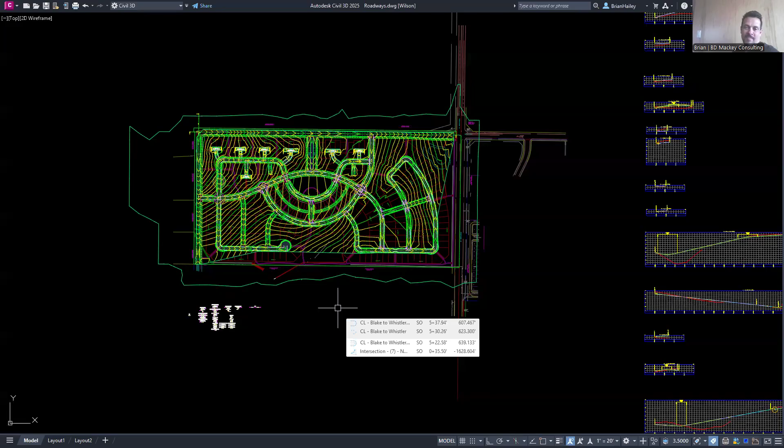And that's why I never say I lock my stuff so people can't screw with me. Right, and it's an easy fix, it's just a Control-0 and Control-9 again. But yeah, it was very, very good. The guy has a good sense of humor, so I knew it would be all right with him.

There was a guy who every time he left his computer, I would go into all of his internet browsers and start browsing for Hello Kitty stuff, then close out of it. All of a sudden he started getting all these ads on Chrome, Edge, and any browser he used for Hello Kitty crap. I would open up search for Hello Kitty in ten different pages, close them all, and come back. He was also using Gmail, so I'd put white text on a white background at the bottom of an email I sent him, since Gmail scans your emails, and I kept putting Hello Kitty in there, like Hello Kitty pajamas. I'd been doing this for a month and a half, and finally he said, 'Dude, this is so weird, I keep getting all these Hello Kitty ads.'

Oh, that's awesome, I like that. That was great, it was a buildup. It took a good month or two before he finally said something, asking what's up with the Hello Kitty crap.

But yeah, thinking back on that class, I miss teaching. Having just whoever come in for a class, I miss doing that. Pretty much the only teaching I do nowadays is either here on Civil Chat or just for my company.

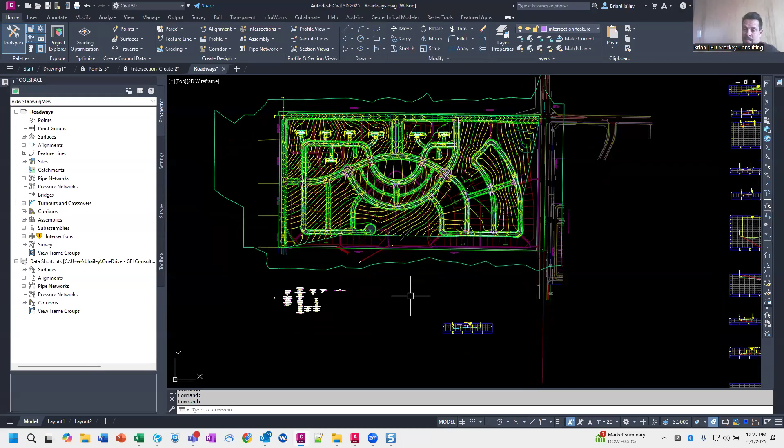Somebody mentioned the text trick. If you notice when I go create a piece of text here... let me create a new drawing, it'll be easier. There's the text that shows up when you create a piece of text, that's the MText jig string. You can set this to whatever you want, like 'Hello.' Now when I create a piece of text, it says Hello. You can play around with that one.

One I did as a CAD manager: everybody came into the office, and down here next to the layout tab, it said 'Brian needs a raise.' That was a fun one.

So, I'm out of practical jokes within CAD. Messing with autocorrect in Microsoft Word is fun too.

My wife and I somehow have our phone settings connected, and for the business she was running, she had lots of short text replacements set up, and one of them was 'pi.' Whenever I tried to type about pi, it would replace it with some long piece of text, and I was totally lost, like why is it doing this? She said, 'Oh, I did that, sorry.' Nice, love that one.